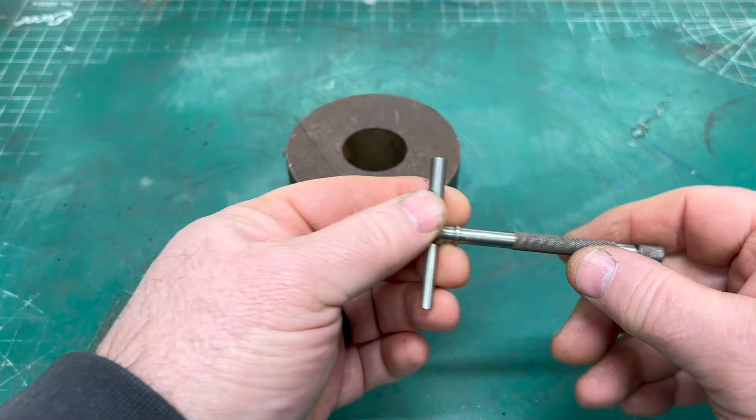Today I've got a project that I want to get started on, something I've been thinking about for a little while, and I think it'll become useful for many projects to come.

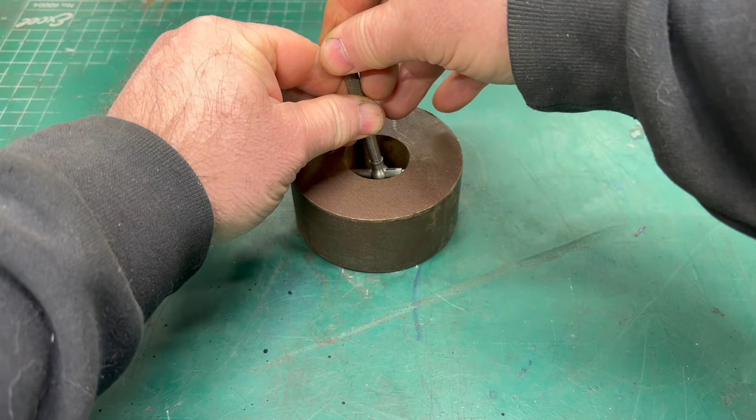I often use these telescoping snap gauges when I want to measure the bore of some object that I'm working on. Once I have that gauge set to the bore, I use a micrometer in my other hand to measure the gauge to determine what the ID of the bore is.

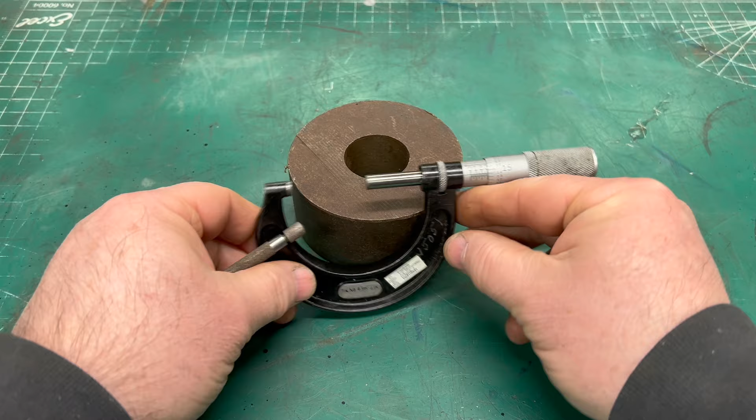This is a pretty easy thing to do, it's not all that difficult. But when I'm using larger micrometers, that can be a real challenge to balance the big ones in my hand. And I think it would be useful if I had some way to hold the micrometer steady in a holder or a stand, and then I can use one hand on the thimble and the other hand to use the gauge.

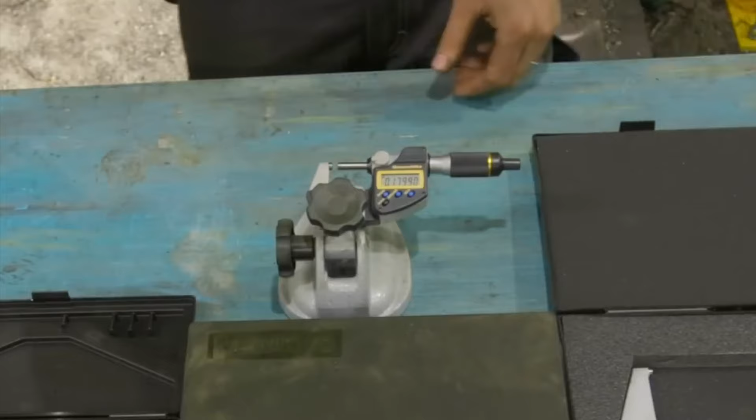I know you all know what I'm talking about, at least I presume you do, and that's something along the lines of this micrometer stand that I saw recently on Kyle Vanover's YouTube channel, Vanover Customs. He was talking about these new micrometers that he purchased and was showing them in a micrometer stand that he received as a gift. And I thought about going out and just buying one, either one like this.

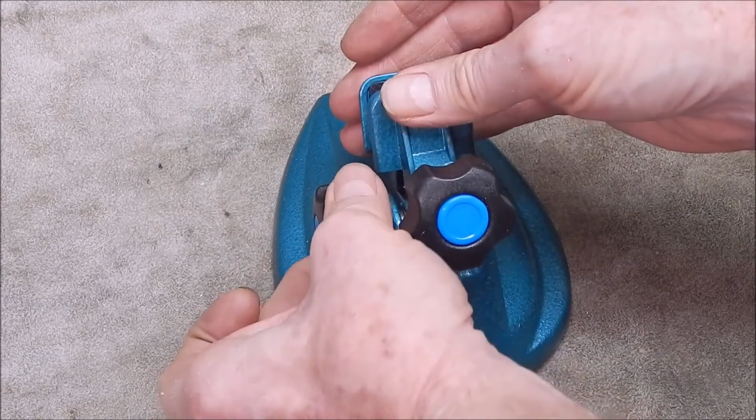I know Starrett makes one, and then you can get a whole bunch of different brands from import companies that look like they're okay, but they also look kind of cheap.

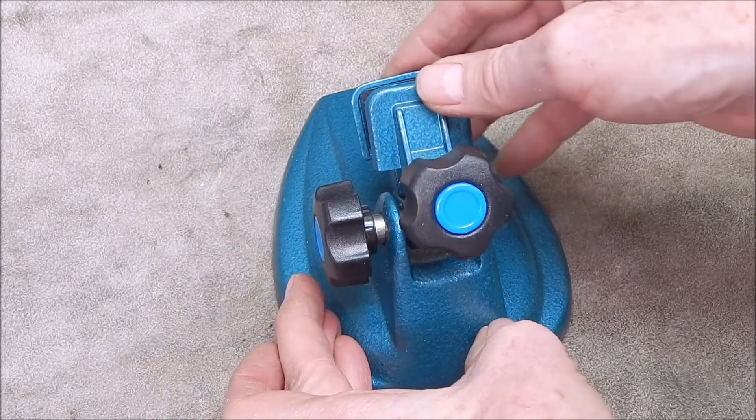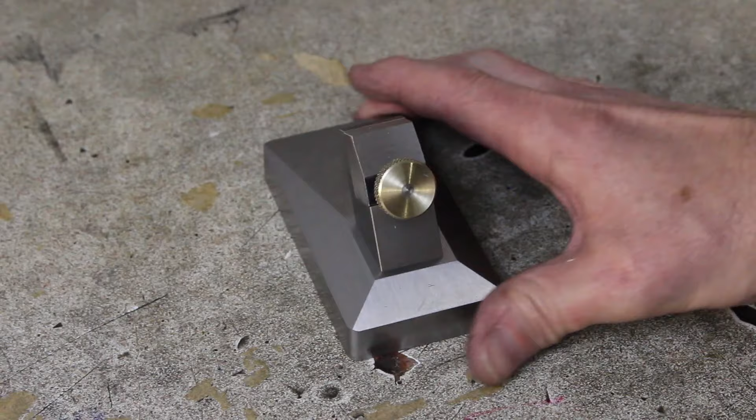So I think what I'd rather do is make one. And so I started looking around for examples of what other YouTubers may have made, or even stuff on blogs and the different forums of what other machinists might have constructed in their own shop, but none of them really kind of spoke to me. They all had some good points, but I wanted to try to find something that put all of those good points together and then kind of added my own personal touches to it as well.

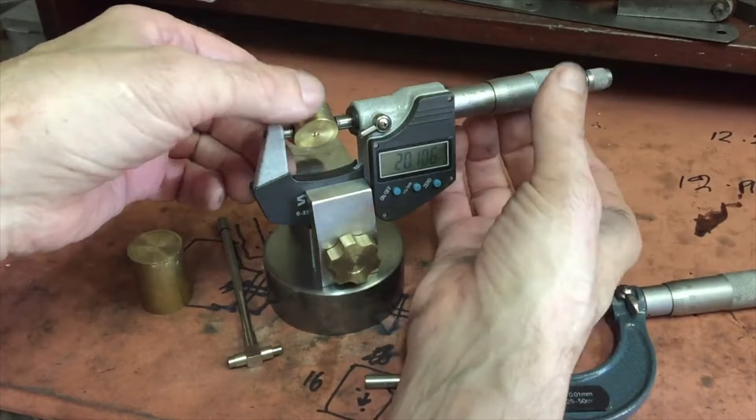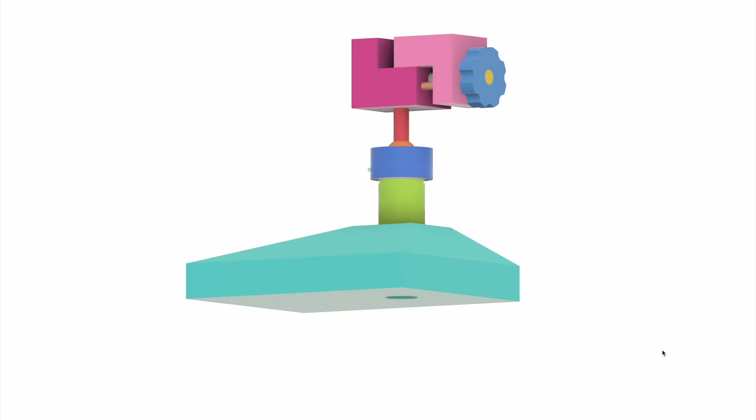So after spending a couple hours in Fusion 360, this is what I came up with. And the idea is that it will have a heavy base and a riser, an adjustable swivel ball joint, and then the clamping mechanism will be on top of that.

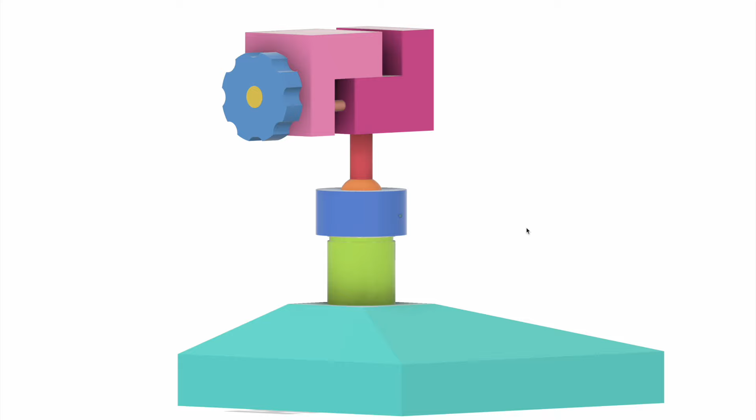You can probably see from this cutaway that it's made from quite a few different parts. I've overcomplicated this thing for sure, but that kind of seems to be a little bit of what I do. So there's about a dozen parts that make up this micrometer stand.

What I like about Fusion 360 is I can do this 3D design and modeling, and then I can easily create design plans from them. So I'll print out a few of the first parts, and we can head into the shop and get started.

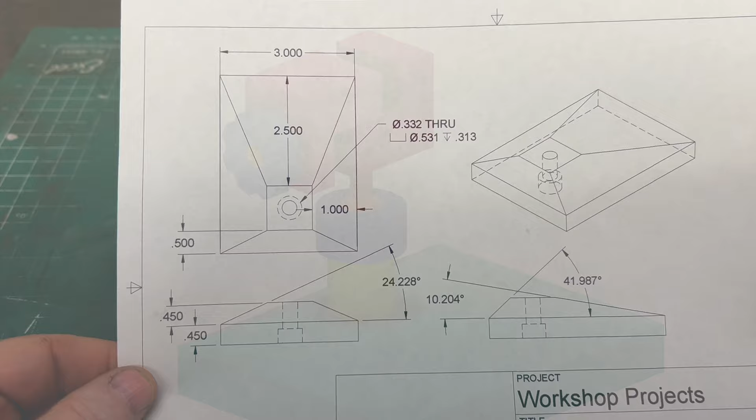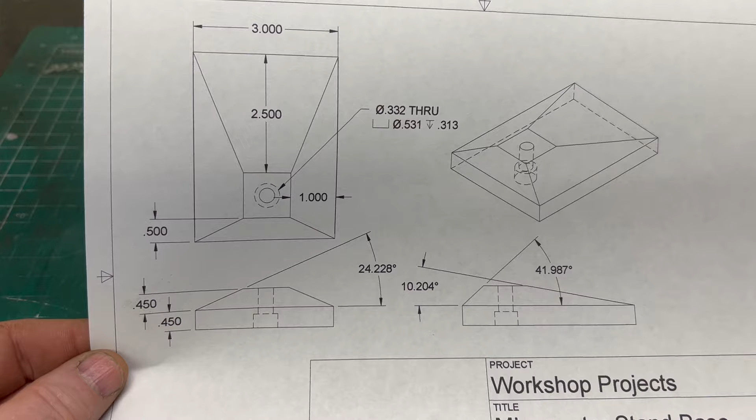I'm going to start here with the base, and at first glance this seems to be a pretty simple part. It's got an X and Y dimension here, although I forgot to put on the length. It's got a hole that's drilled into the center of it, and it's got these different facets in it that just kind of give it an interesting look.

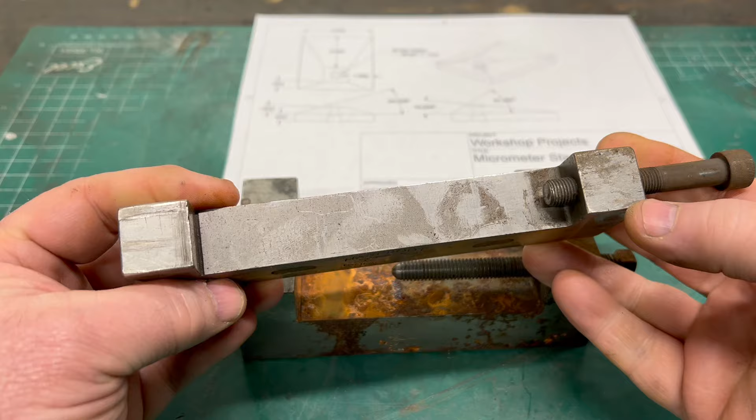For stock, I'm going to use this piece of tooling that came home with me from an auction lot. It had a bunch of other stuff in it, including these fixtures. I have no idea what these things were originally used for, although they're stamped with Hasserot Machine Tool from right here in Cleveland, Ohio. They're still in business, like a tool and die company, so it must have something to do with tool and die work, but I don't know for sure. If you know what these things might be used for, leave a comment.

I do want to get over to the bandsaw and trim off these ears though first.

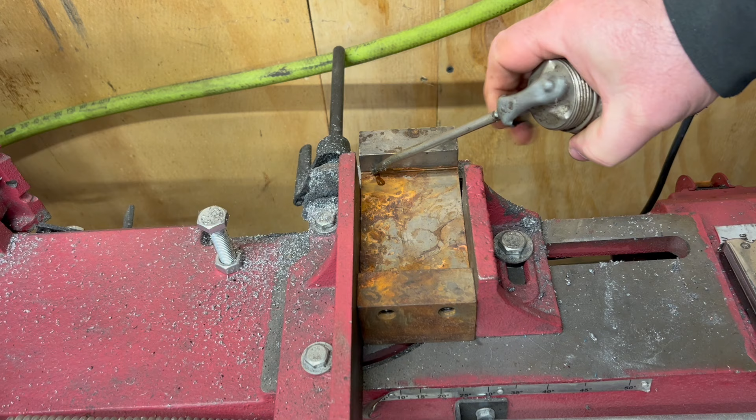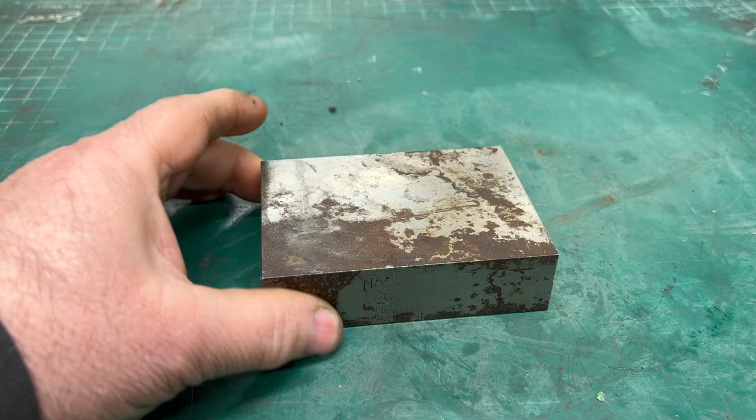Well, it was pretty easy work on the bandsaw. It went right through it just fine. I also checked these with a file, and the file cuts it just fine. I'm sure this is made out of some kind of tool steel, but it seems to be fairly machinable, at least up to this point.

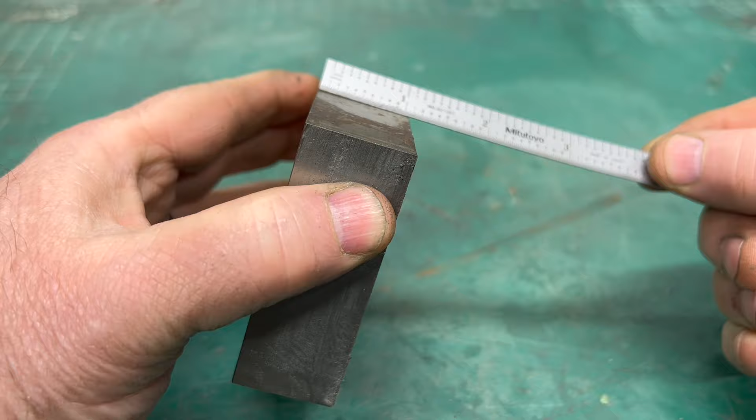My dimensions on the drawing are going to probably change a little bit once I get this cleaned up, and I think I want to use the shaper to do that.

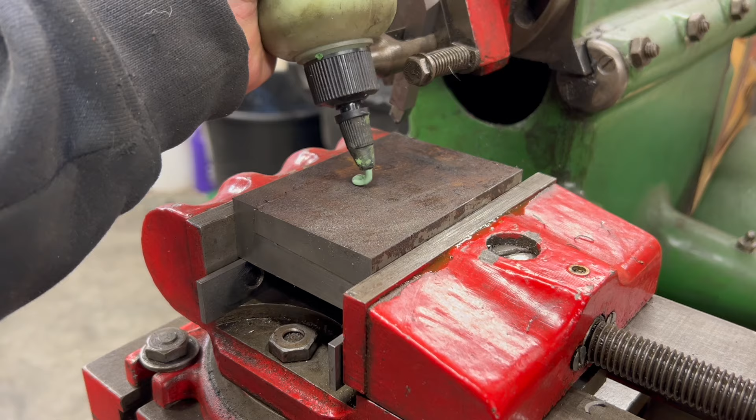Well, I got this set up in the shaper here to try to clean up this top surface. I am using some Anchorlube here as a lubricant, cutting fluid. I've really begun to appreciate this more and more as a cutting fluid, not just for drilling and tapping, because it doesn't smoke, it doesn't stink, and I think it does a really good job of keeping the tool and the part cool.

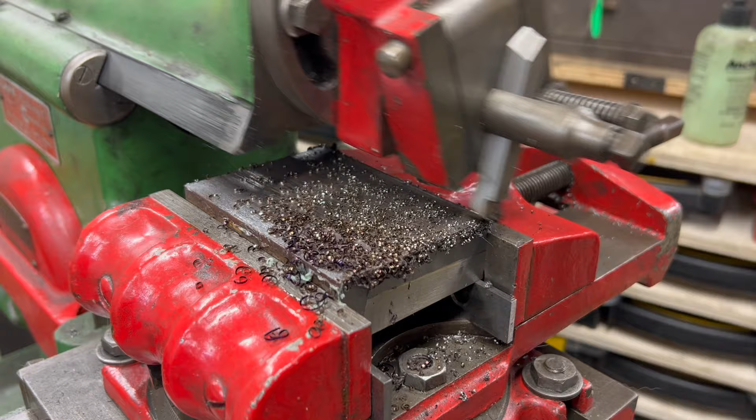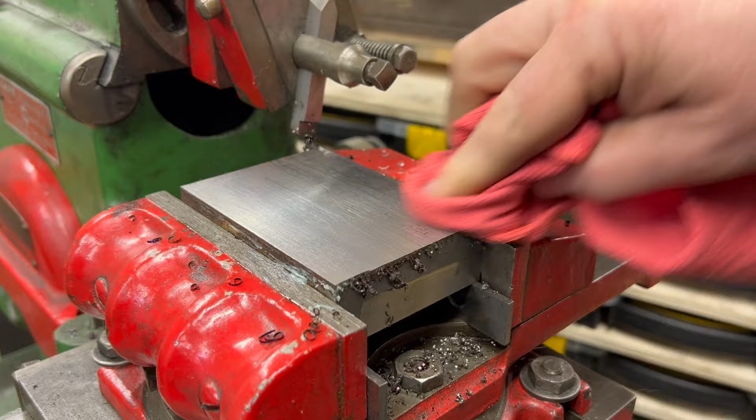Well, the surface finish is not as good as I would like it. It started off pretty good, but then as it got toward the opposite end, it started getting really rough. And I think maybe that had something to do with the rust, possibly. I'm not really sure, but I'm going to take this tool out and give it a hone, sharpen it, and then I'm going to try to take another pass.

I still have 50 thousandths or so to come off on the thickness, so I have a little bit of room here on this side before I turn it over to start machining that side. So with the tool now freshly sharpened and honed, I'll take maybe another 20 thousandths off of this surface.

Well, unfortunately, once again, the surface finish is terrible. It's not just that it looks bad, but you can feel the roughness, the texture in the surface, and that's just unacceptable. So maybe this material is a little harder than what I thought, or I didn't get a good grind or hone on the tool bit.

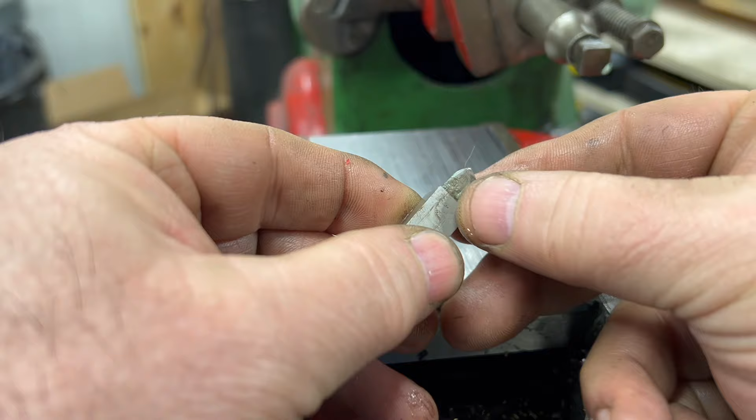I'm probably going to have to regrind it, unfortunately. It's got a really good profile, and I really didn't want to have to do that. But I'm laying bets on this as just being harder than I expected. So I think what I'm going to do is unfortunately abandon the use of the shaper and take this over to the milling machine and use a face mill.

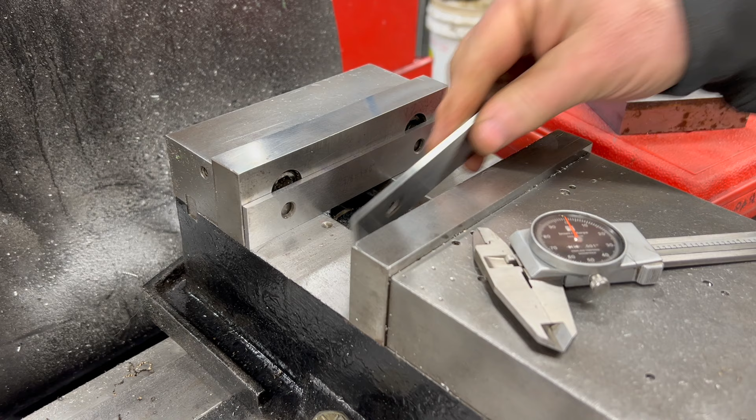So we got it in the mill here. Again, a little bit more Anchorlube on the surface. I'll probably take maybe 15 thousandths off here. I don't want to go too far below my target of 1 inch. If I go below that, it's not a big deal, I can just adjust the drawing. But I think we'll try 15 thousandths and see how it does.

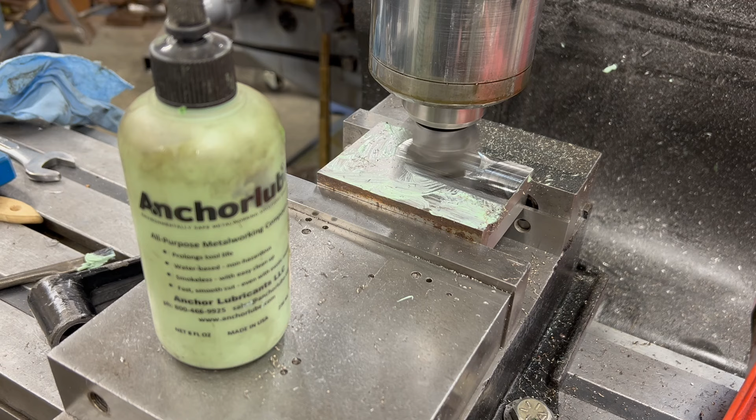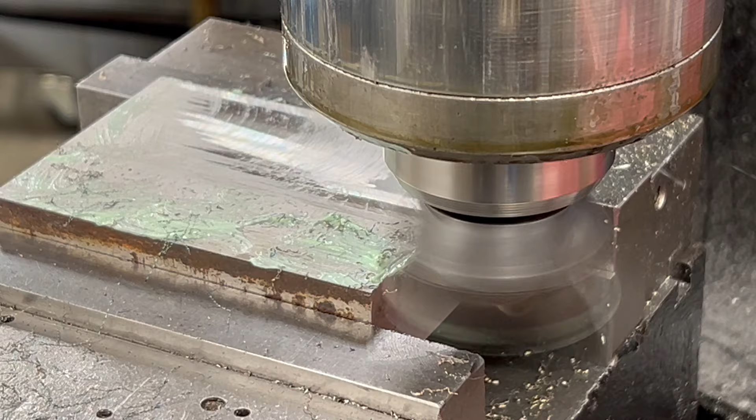Well, I will say it's interesting that as it traversed to the opposite end, that it didn't actually cut anything. I didn't think that this piece was that much out of square, at least it wasn't when I was trying to mill this on the shaper. And it looks like here when I try to mill the second half, again, the face mill's not even touching the part. Something is not right.

Well, I rotated the inserts around and put a fresh corner on all of them. I probably should have done that to begin with, and we'll see if this is going to do any better.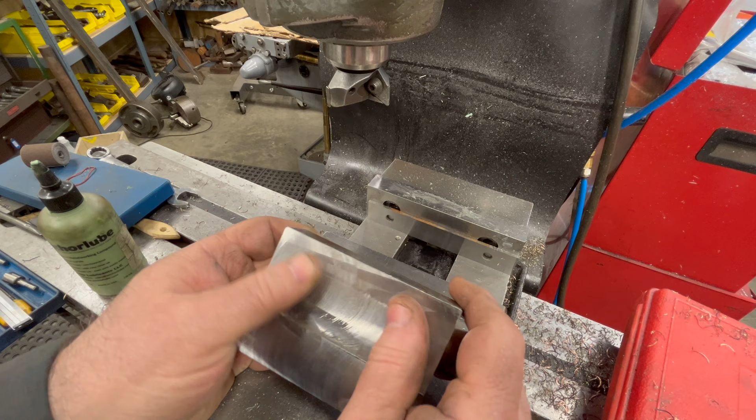Well, that last pass made it better. It's still not perfect. I think I'm going to just keep going with it and see where it takes me.

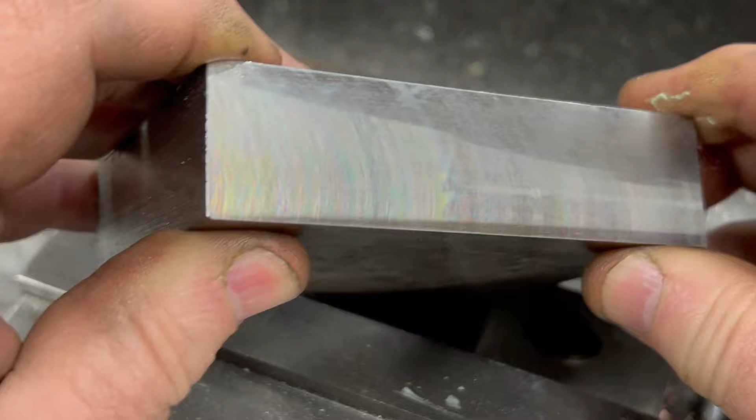Now this side here came out great. You can see some machining marks in it, but you can't feel them. So I don't know, maybe that front surface is just a little bit harder, or maybe it was just a hardness layer. Let's keep going.

Yeah, it's definitely harder on the faces. There's got to be some, what do you call it, case hardening on this piece that I'm trying to mill through. I think that's what all the sparks are coming from. The chip color is interesting. It's a very copper colored chip when it cools down. It's not the blue or sort of that tan color you would expect to see, it's a copper color. So I don't know if that's a good indication of what kind of tool steel this is made out of. I'll have to do some research and see if I can figure out if that might tell me or give me a clue as to what material, what alloy these things were made from.

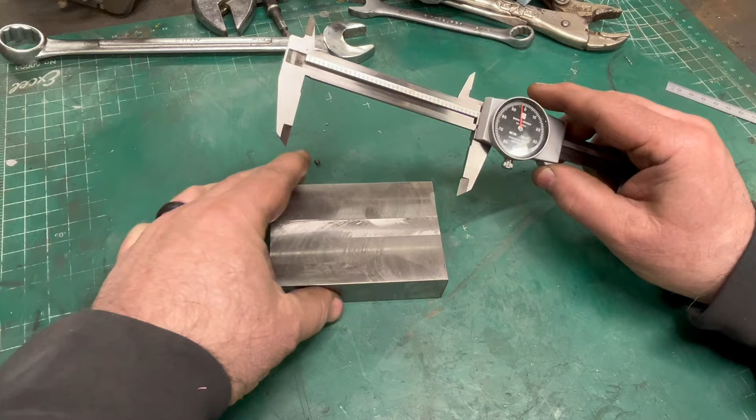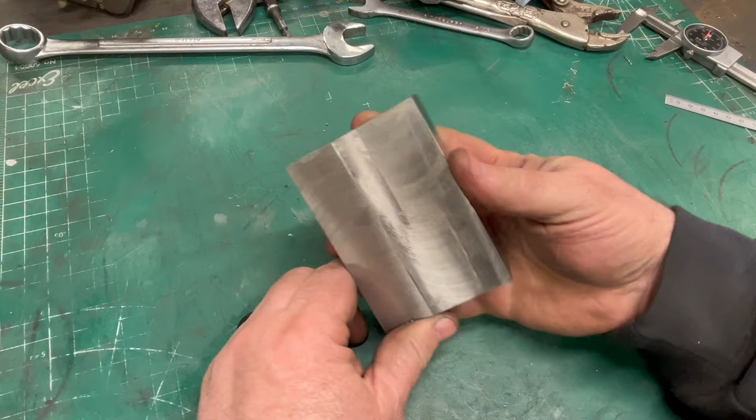Well, I'm finished milling it to its overall dimension here. I didn't get the target dimensions I was expecting, but that's okay. I can always redo the drawing. But the surface finish, it's just not acceptable. I think I'm going to have a lot of problems when I go to do the other machining, trying to machine those facets on the top.

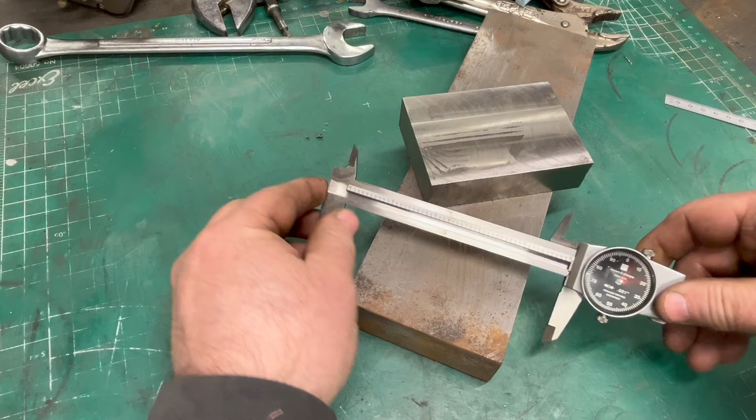So what I think I'm going to do is scrap that part. I really wasn't happy with the surface finish, and I felt like I was going to be fighting it and fighting it. So I've got this other piece of stock that I think I can get a nice chunk out of. It's going to be a little bit bigger than my original drawing, but that's okay. I can always adjust the drawing to the size of the material.

So I just need to take it over now to the bandsaw. We'll go ahead and cut off a chunk of it, and I guess we're starting over.

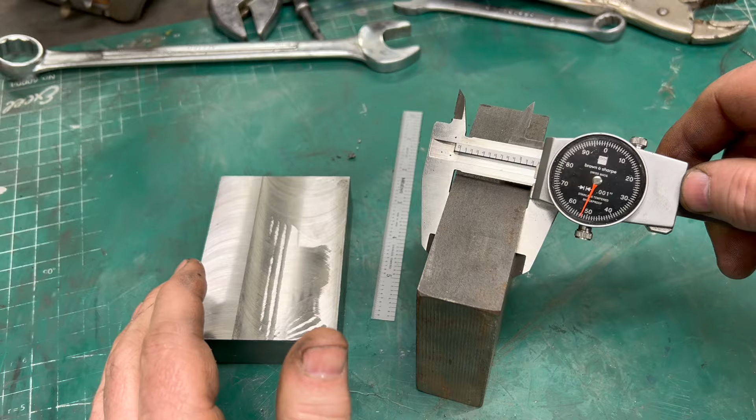Well, here I got it fresh off the bandsaw. Say what you want about these Harbor Freight bandsaws, but I'm telling you, it cuts a pretty square cut. Spend a little bit of time with them, and you can dial them in and turn it into a really great tool. This base is going to be a lot bigger than my original drawing, but like I said, I can just go back into the CAD drawing, change the dimensions, and then everything else adjusts. So I think we're going to go ahead and take this back over to the shaper and see if we can't get this cleaned up and square.

Well, once again, a less than ideal surface finish. I think the tool bit that I have in here is just dull. I'm going to have to sharpen it. I don't think it's the material, but it could be.

So what I'm going to do, I've got another tool that I know is sharp, and it's more of a finishing tool. It's got a rounder cutting edge on it, so I'm going to put that in the shaper and give that one a try.

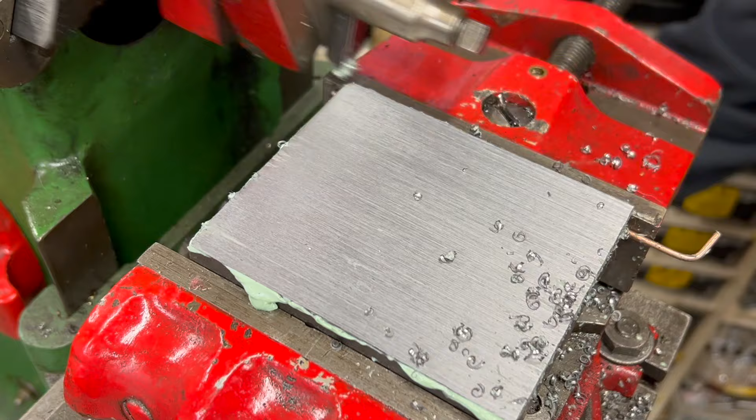Well, I just can't catch a break with the shaper. I know those tools are sharp, at least they certainly feel sharp on my thumbnail, but I am just getting horrible surface finish on the majority of it. On one end, it seems fine, but on the far end here, it seems to be getting rougher. I'm not exactly sure how to explain how this feels. It might be difficult to see it, but rest assured, it's unsatisfactory.

I can't, in good conscience, continue with this. So it's back over to the Bridgeport, and this time I think I'm going to use the fly cutter. I've had really good success with it, but then again, I've had really good success with these other tools. So maybe this just isn't my day.

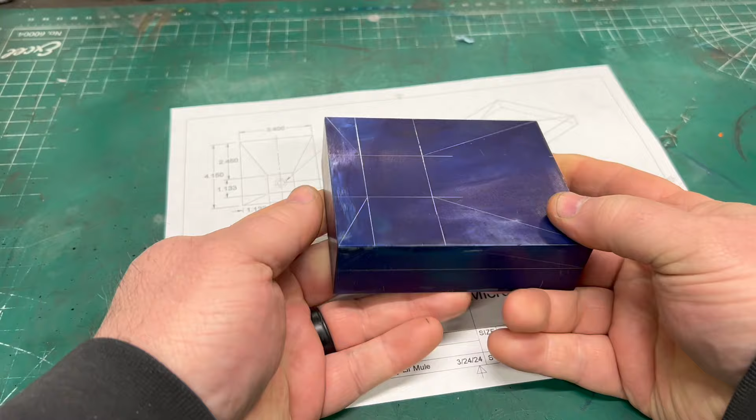Well, I have new calculations on the drawing, and I put some Dykem on it with some anti-bozo lines on here, so as I machine these different facets, it will let me know if I'm getting close to screwing up. But the first thing I need to do is bore the hole that is going to be used to mount the riser.

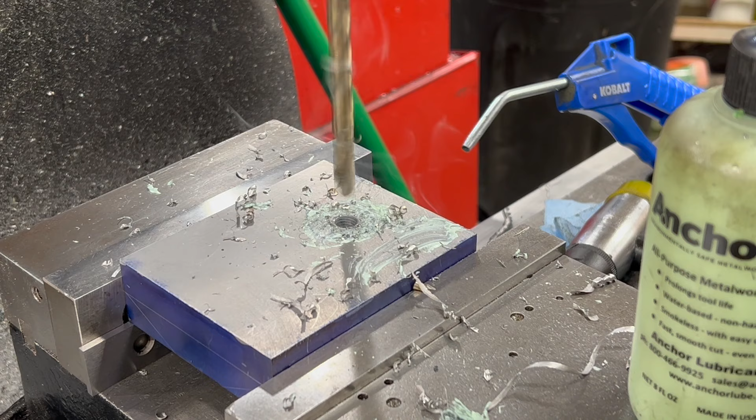Well, I know I'm breaking some kind of cardinal rule here by putting an end mill in a drill chuck, but I'm just using this for the counter bore for the socket head cap screw that will be used to mount the riser to the base. So I'm not going to be side milling with this, I'm just going to be boring this down maybe 300 thousandths of an inch.

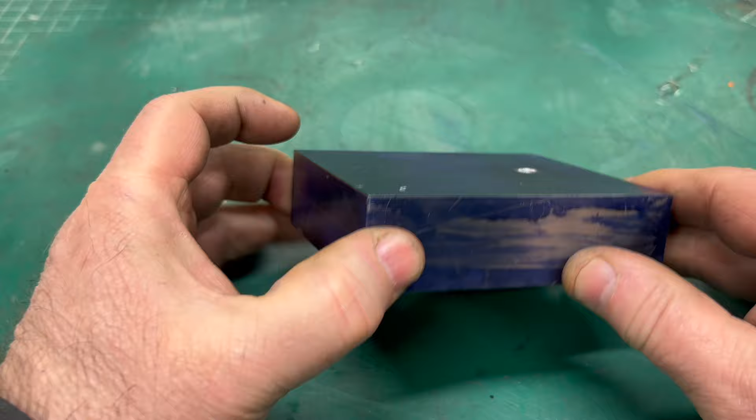Well, with the main machining done and the hole drilled for the mounting bolt, I can now concentrate on machining these facets. Now I need to figure out how to set these up in the mill so I can machine off the surfaces at these rather precise angles.

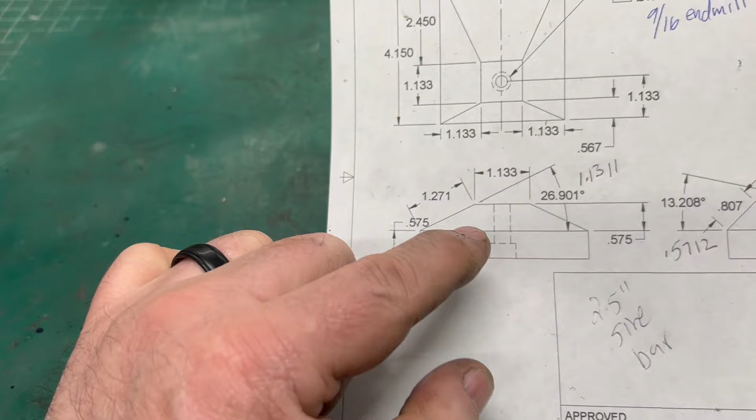Well, to figure out what those angles are, I let the CAD software do it. I put all the dimensions in I want, and then I let it calculate, for example, this angle here being 26.901 degrees. I know I'm never going to get that close, but we'll see how close we can get.

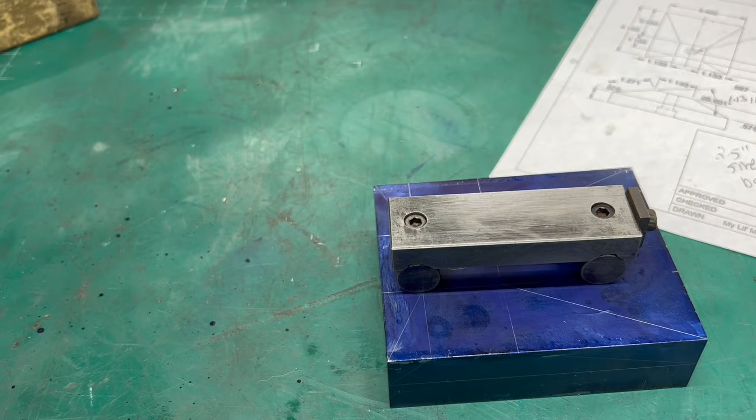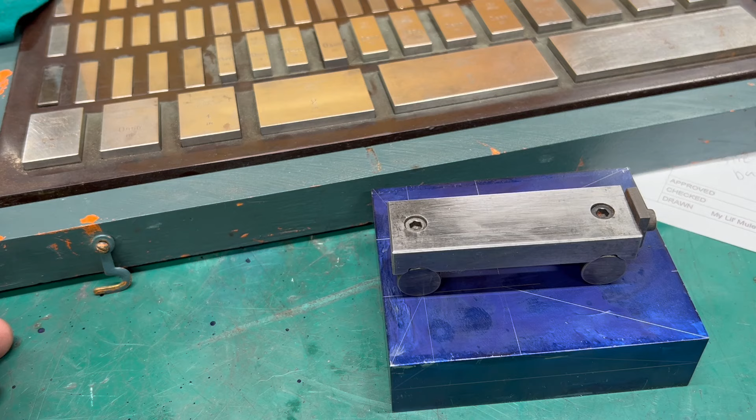And how I get that angle is I'm going to use a little trigonometry and this 2.5 inch sine bar, along with a set of precision gauge blocks. Well, these were precision at one time, I'm sure, but they're good enough for the stuff that I do in my shop. I'm not using them for inspection, I'm using them mostly for setup.

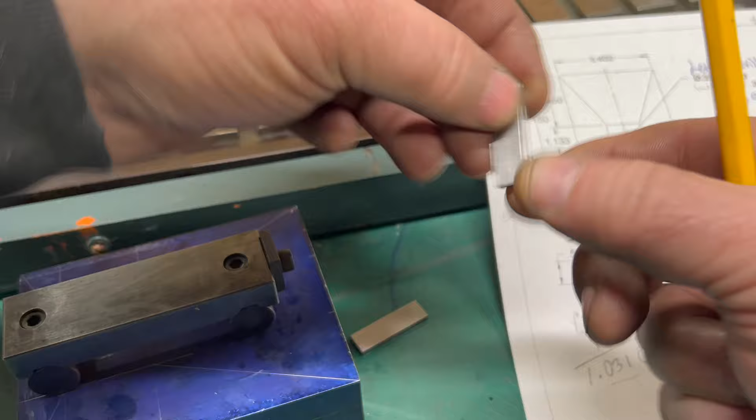Well, using a little trigonometry, I know that in order to get a 26.901 degree angle with a 2.5 inch run, I need a rise of 1.1311 inches. Now it's just a matter of stacking up gauge blocks in order to get a height that's equal to 1.1311.

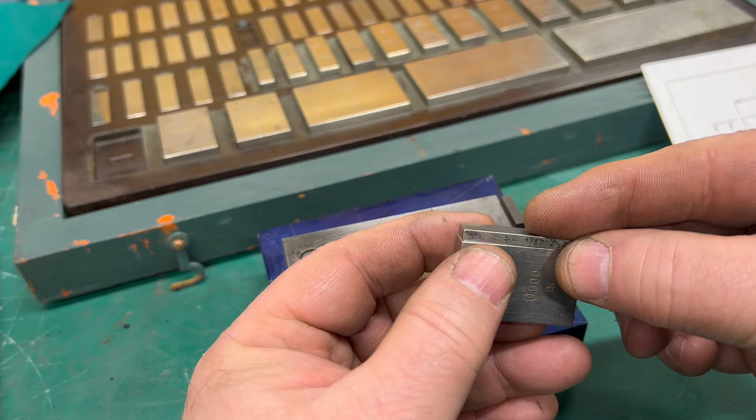Well, I have my stack of gauge blocks here, and just to do a little bit of a sanity check, we'll bring a micrometer over here and check to see if I am in fact getting 1.1311. And it might be off by a half a thousandth or so. These gauge blocks aren't great, and that looks like it's off a little bit, but again, close enough for what I need these for.

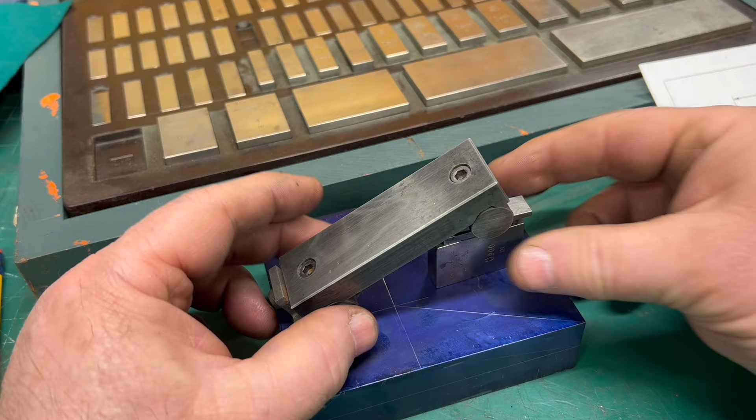So in theory, if I set these up underneath one end of the sine bar, that should set the angle of this sine bar relative to the base to 26.901 degrees.

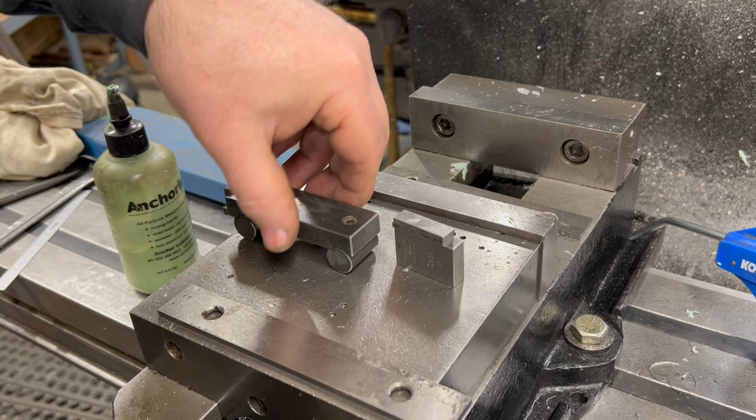Well, I've got a parallel flat on the base of the vise here, and I can now put my gauge block stack and my sine bar on top of that. That should give me some assurance that that is flat. And then I can go ahead and put my stock in the vise and clamp it down.

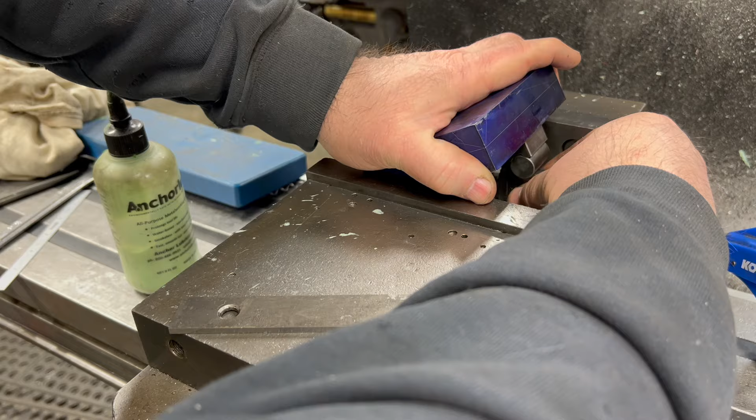Well, I'm sure there's much better ways to hold this part in the vise than using gauge blocks and a sine bar. Maybe there are, but I'm doing what I know and I'm working with what I have.

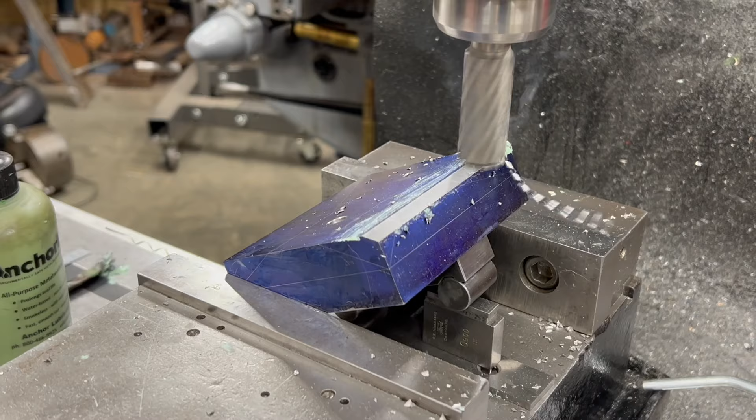Well, I'm not super happy with the finish on this, so I think I'm going to swap this end mill out for something else. Well, I just have a simple 2-flute end mill in here now, and we'll try to take another 100 thousandth step to cut.

Well, I decided to take the other pass on this the opposite direction, which is essentially a climb cut, and this was a mistake. It's really hard to see on camera, and you really don't notice it until you start looking at the overlap line or even where the cut finishes. But the climb cut was actually pulling the part up out of the vise at that angle.

So where the sine bar is touching that stack of gauge blocks, well, right here it's not touching anymore. It's actually pivoted up, and it's now away from where it was originally held, and I ended up taking a deeper cut than what I intended. Something happened there.

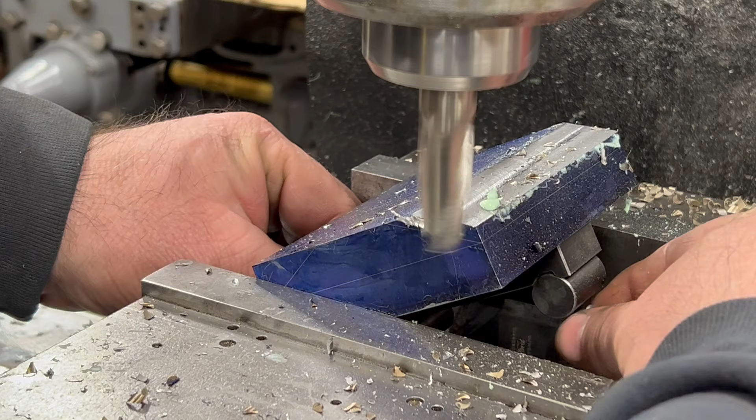Yeah, those gauge blocks are no longer touching the sine bar, and actually pulled up a good 60 thousandths. Now my flawed thinking here was that I'll just take lighter passes and I won't have this problem. Of course, that is also a mistake. I was able to get away with this. I was thinking that I would rather save the time in machining, but that's some flawed thinking.

So after this last climb cut here, I decided to go back and just do pure conventional milling. And that way the forces on the workpiece are to the right and down, and that'll keep that sine bar pressed against those gauge blocks.

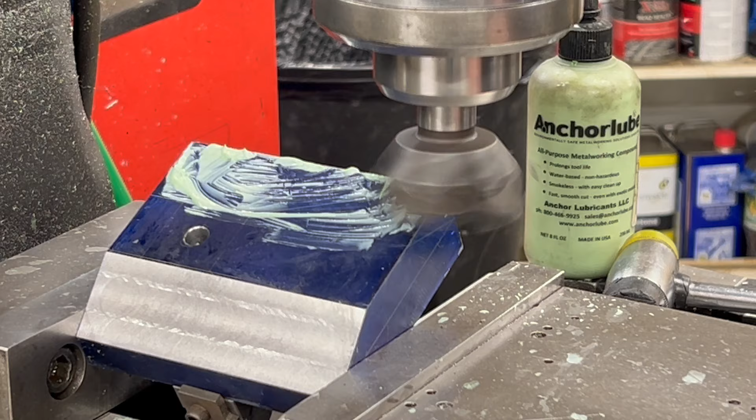To machine the rest of these angles, I decided to switch over to this 2-inch indexable face mill. I really don't like this tool; it gives me a little more chatter in the finish than I'd like. But for this part, I think I can get away with it, and I'll clean it up on the Scotch-Brite wheel anyway to smooth out the finishes. I want to take 100 thou depth of cuts and try to do this in single passes rather than multiple passes per depth of cut.

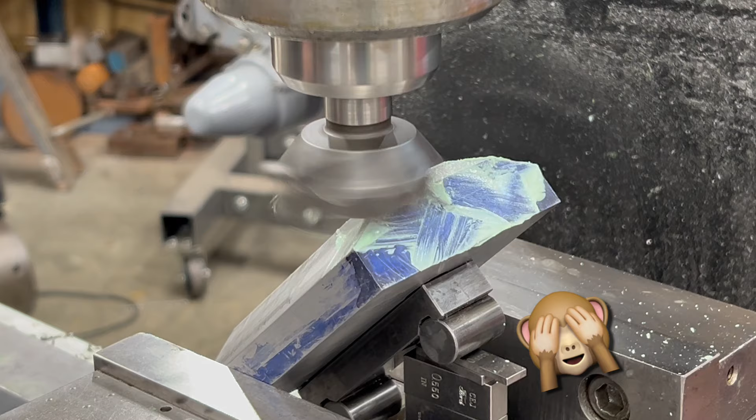This is probably the most jacked up work holding setup I could have come up with. I couldn't come up with anything else that would hold this piece at the angle I wanted easily with the tools I have, so this is what I have. A sine vise would be nice, or even a machinist vise I could set up in here, but I don't have anything that would fit. So this is what I have. I'm just going to be careful, take lighter cuts, but I think we can make this work.

Well, that can't be good. Okay, back to the drawing board here - let's see if I can figure out how to keep these gauge blocks in position.

Well, we'll see how this works. I've got a big setup block that I use a lot, clamped to the base of the vise with a toe clamp, and it's really just there to hold those gauge blocks in position so if they do rattle, they don't have anywhere to go.

This is my last setup here to machine these facets, and it's a little bit better than the previous one - there's a lot more of the stock still in the vise. I've still got that setup block toe clamped to the vise to keep the gauge blocks from migrating, but this should be a little more stable.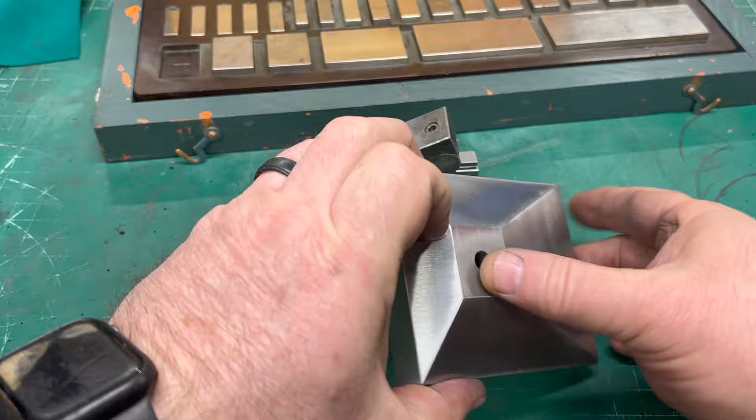Here's my finished part. I spent a little time with the Scotch-Brite wheel on the buffer, and that cleaned up most of the machining marks. There's still some left on that large facet, and it's a little disappointing - I need a better face mill than that. I bought that one off somebody on Practical Machinist, and it was pretty worn. I got it cheap, knew it wasn't going to be the greatest, but it's been working for me up until now. Maybe part of it is this material - I still don't know what it's made from.

I will say it was fun to use the sine bar for the first time, and the gauge blocks to set a precise angle. It's pretty interesting what you can do with tools that seem simple, as long as they're made right. Getting these angles and all these facets to line up was really cool to see come together.

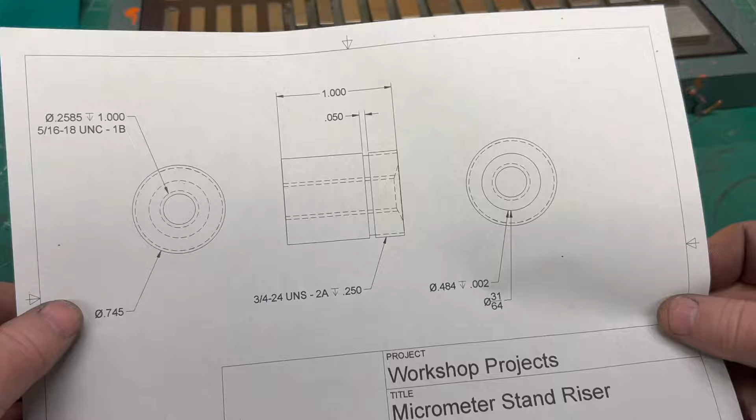The next part I want to make is this riser. This will get bolted to the base with a threaded hole down the middle, and there'll be a 3/4-24 threaded part on the end for the clamp nut.

I think I'm going to do that in another video. This piece here, even though it seems simple looking at it, actually presented a lot more challenges to me than I was expecting.